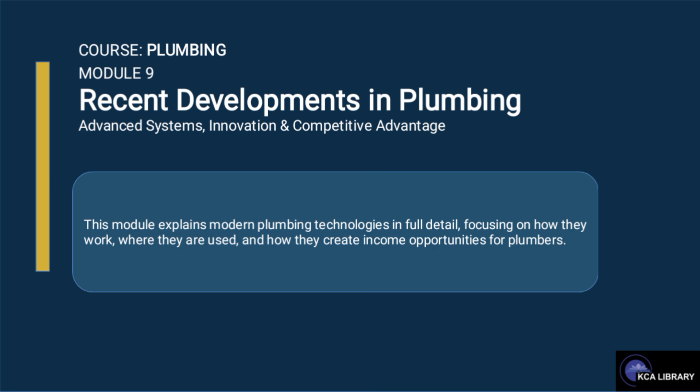We are gradually coming to an end in this course, plumbing. We'll be looking at Module 9, recent developments in plumbing, advanced systems, innovation, and competitive advantage. So this module explains modern plumbing technologies in full detail, focusing on how they work, where they are used, and how they create income opportunities for plumbers.

So by way of module objectives, this module aims to introduce learners to recent developments and innovations shaping the plumbing industry, enabling them to move beyond traditional practices and adopt modern solutions. By the end of the module, learners will understand key advancements such as smart plumbing systems, eco-friendly features, PEX piping, solar water heating, and digital tools, and explain how these technologies improve efficiency, reduce cost, and enhance service delivery.

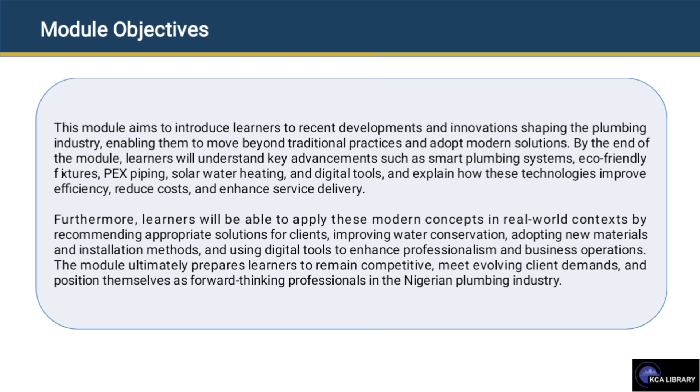Furthermore, learners will be able to apply these modern concepts in real-life context by recommending appropriate solutions for clients, improving water conservation, adopting new materials and installation methods, and using digital tools to enhance professionalism and business operations. The module ultimately prepares learners to remain competitive, meet evolving client demands, and position themselves as forward-thinking professionals in the Nigerian plumbing industry.

By way of introduction, plumbing is no longer limited to pipes and fittings. The industry is now integrating electronics, automation, and sustainability systems. This shift changes the role of the plumber from a repair worker to a system specialist who understands both water and technology. So those who adapt gain access to higher paying jobs, while those who ignore these changes risk becoming outdated.

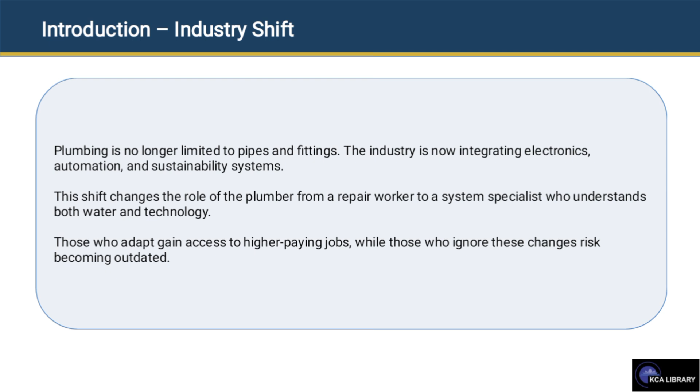So smart plumbing, what is smart plumbing? This combines sensors, connectivity, and automation to monitor and control water usage. Instead of waiting for problems to occur, these systems will detect issues early and respond automatically. So it's now shifting from reactive maintenance to predictive maintenance.

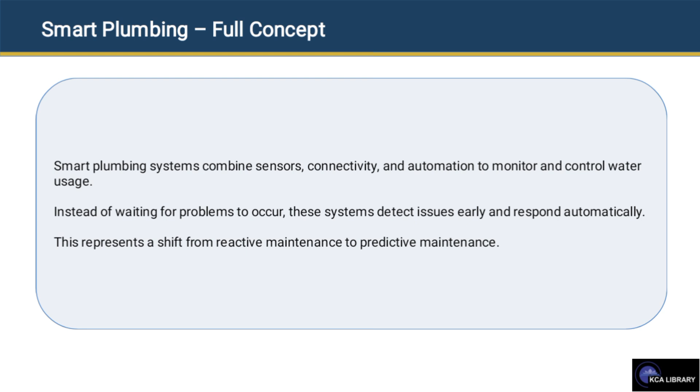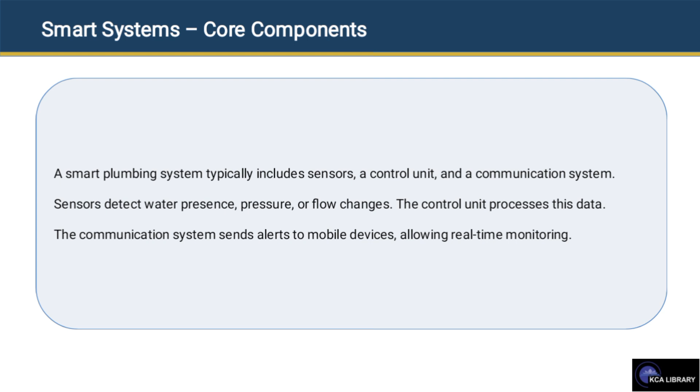Smart system, what are the components? So for this smart plumbing, these are the components. It involves sensors, control units, and communication systems. The sensor will detect water presence or flow change, while the control unit will process the data and communication will send alerts, allowing real-time monitoring.

Smart leak detection, how it works. So leak detectors use conductive sensors. When water touches both contacts, an electrical circuit is completed. This will trigger a signal that is sent to the central or mobile device. This process happens instantly, allowing early detection before visible damage occurs.

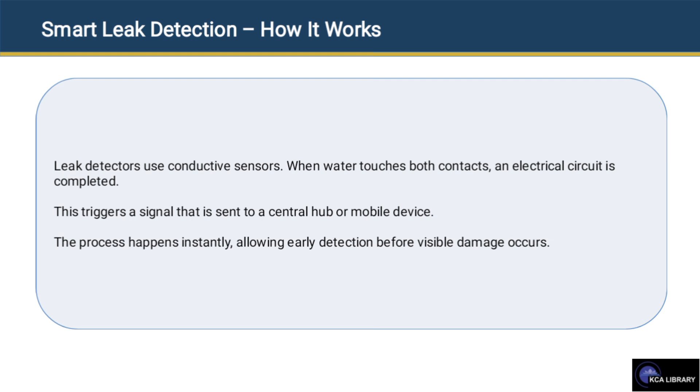Now, what is the real impact of this smart leak detection? A small leak under a sink can go unnoticed for weeks, causing wood rot, mold growth, and structural damage. Smart detection prevents it by alerting the user. This reduces repair cost and prevents property damage.

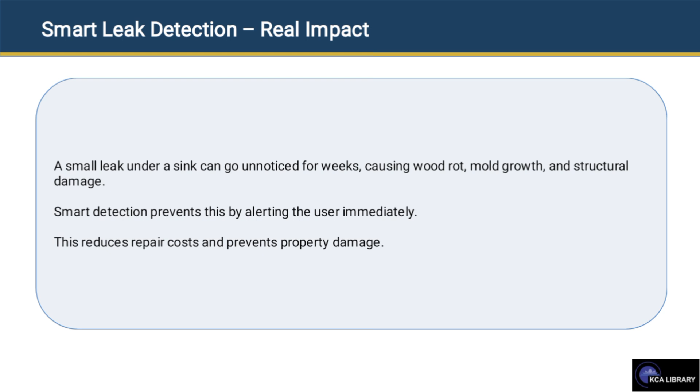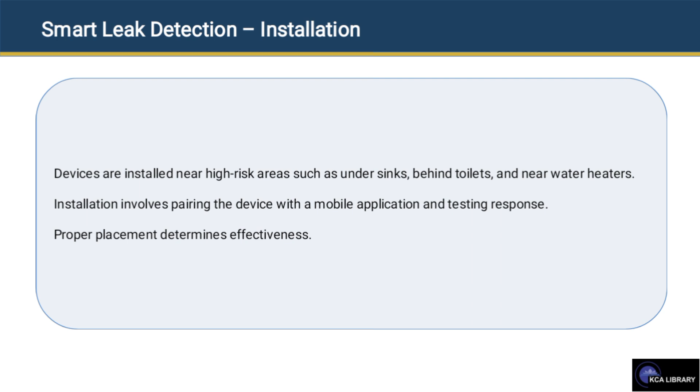So how do you install? Devices are installed near high-risk areas such as under the sink, behind the toilets, and near water heaters. Installing this involves pairing the device with a mobile application and testing the response.

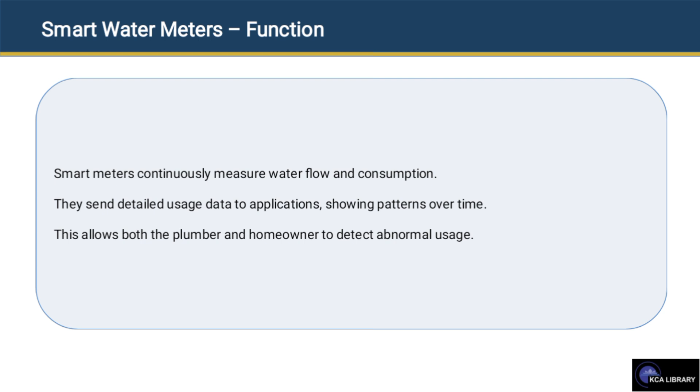Let's look at smart water meters. What are smart meters? They continuously measure the water flow and the consumption and send details to an application showing the patterns over time. It allows you to detect abnormal usage.

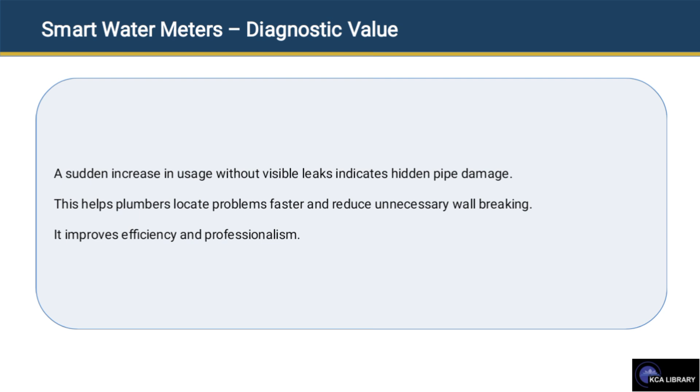Now, let's look at the diagnostic value. A sudden increase in usage without visible leaks indicates there's hidden pipe damage. This will help the plumber to locate problems faster and reduce unnecessary wall breaking. It improves efficiency and professionalism.

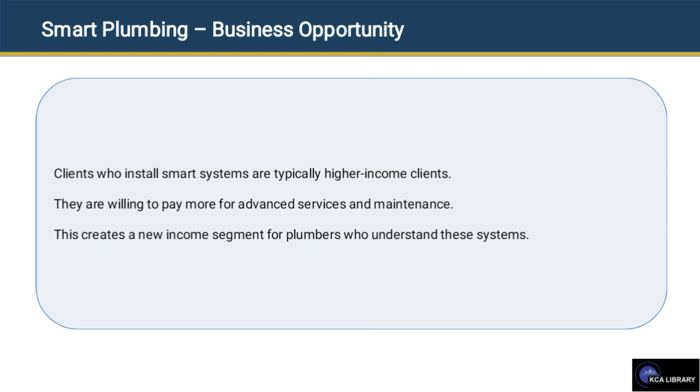Now, for the business opportunities, clients who install smart systems are typically higher income clients, which is true. They are willing to pay more for advanced services and maintenance.

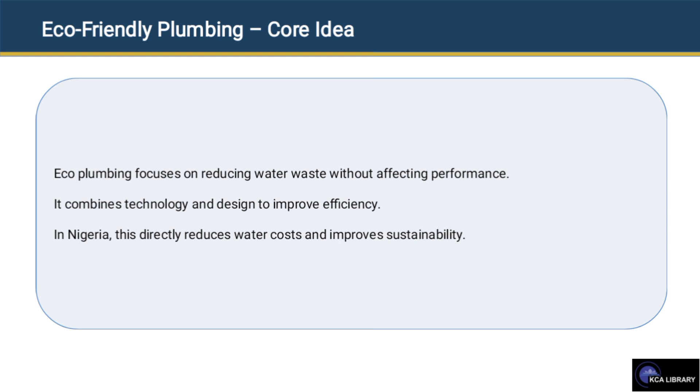Let's look at the core idea of eco-friendly plumbing. Eco-plumbing involves reducing water waste without affecting your performance. It combines technology and design to improve efficiency. In Nigeria, this directly reduces water cost and improves sustainability.

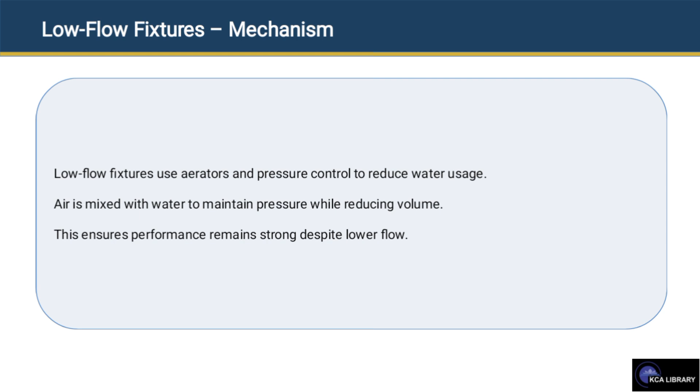Let's look at low flow fixtures, the mechanism. Low flow fixtures use aerators and pressure control to reduce water usage. Air is mixed with water to maintain pressure while reducing volume. This ensures performance remains strong despite lower flow.

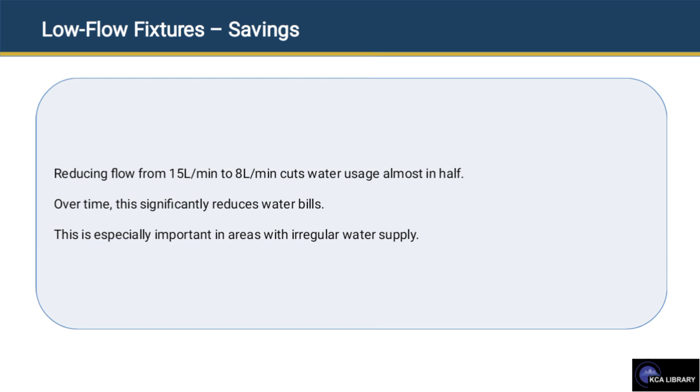Let's look at savings. Low flow fixtures savings. Reducing flow from 15 L per minute to 8 L per minute cuts water usage almost in half. Over time, this significantly reduces the water bill. This is especially important in areas with irregular water supply.

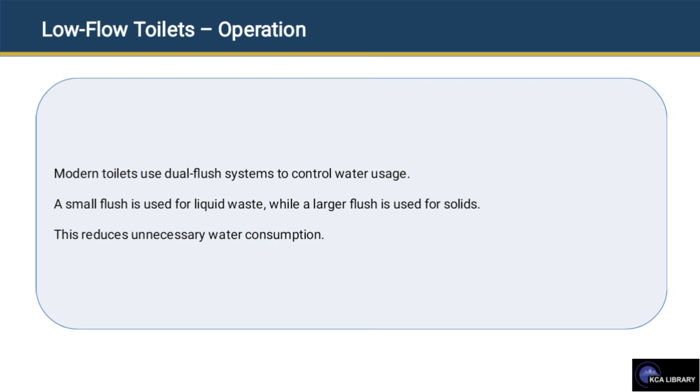Let's look at the operation of low flow toilets. Modern toilets use dual flush systems to control water usage. A small flush is used for liquid waste, while a larger flush is used for solids. This will reduce your water consumption.

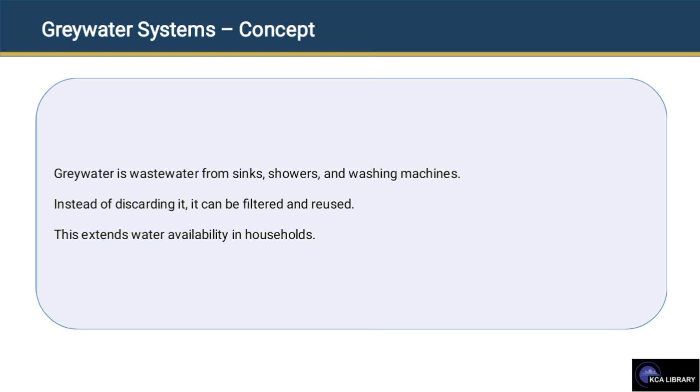The system flow in grey water, how it works. Water is collected from outlets, filtered, and stored in a separate tank. It is then reused for irrigation or toilet flushing.

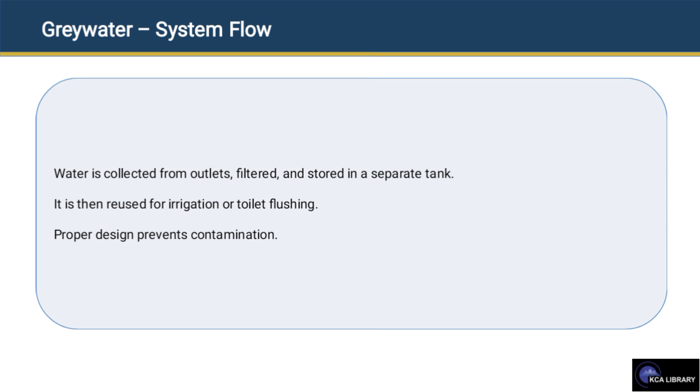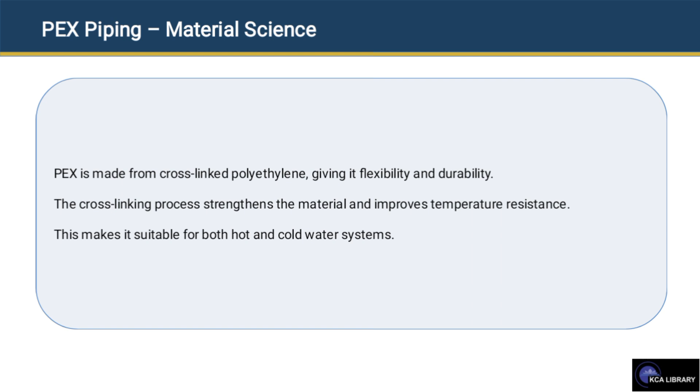Let's look at PEX piping. PEX is made from cross-linked polyethylene, giving it flexibility and durability. The cross-linking process strengthens the material and improves temperature resistance. This makes it suitable for both hot and cold water systems.

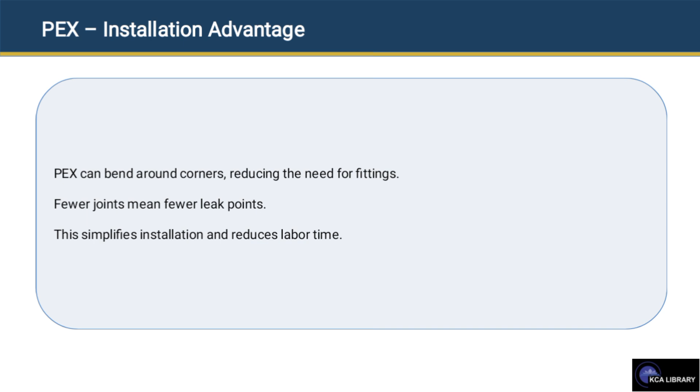How do you install? What are the advantages? PEX can bend around corners, reducing the need for fittings. Fewer joints means fewer leak points. This simplifies installation and reduces the labor time.

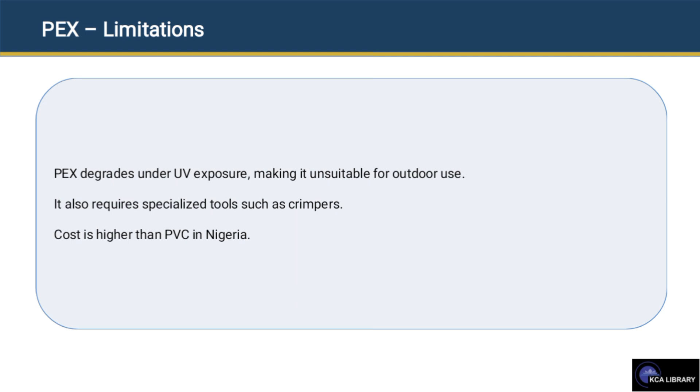Limitations: PEX will degrade under UV exposure like the sun, making it unsuitable for outdoor use. It also requires specialized tools and it is very expensive.

Let's look at solar water heating. Solar heaters use sunlight to heat water through collectors. Heated water is stored in a tank for later use. So this reduces electricity dependence, especially in Nigeria where we may not have electricity.

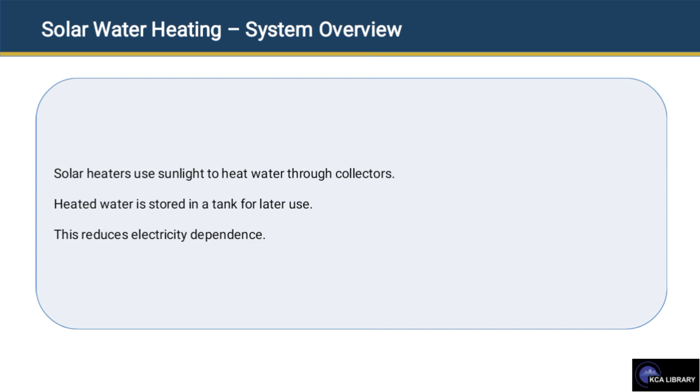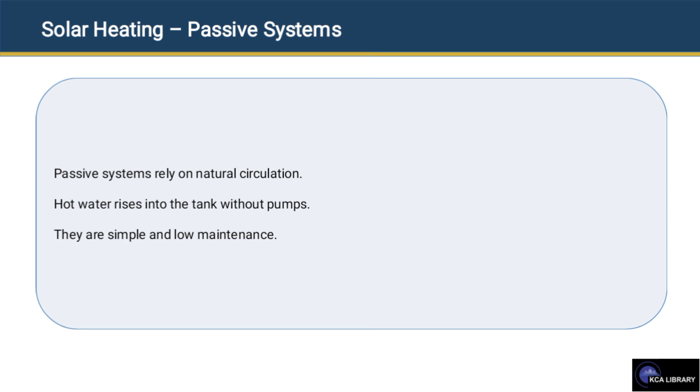Solar heating. Let's look at the passive systems. Passive systems rely on natural circulation. Hot water rises into the tank without pumps. They are simple and low maintenance. Then we have active systems. Active systems use pumps and controllers to move water. They are more efficient for large buildings, but they are complex and more expensive.

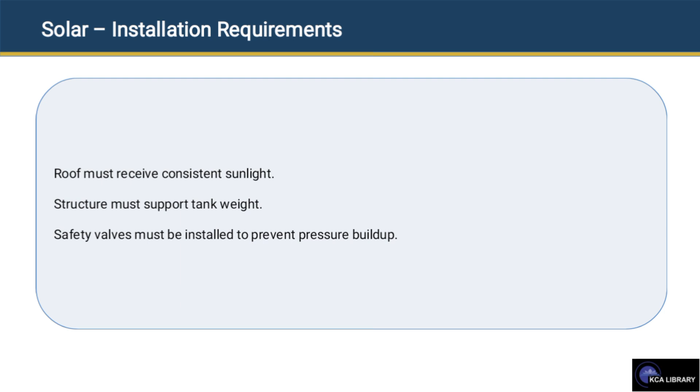Then what are the requirements? The roof must receive consistent sunlight. It must support the tank weight. And safety valves must be installed to prevent pressure buildup.

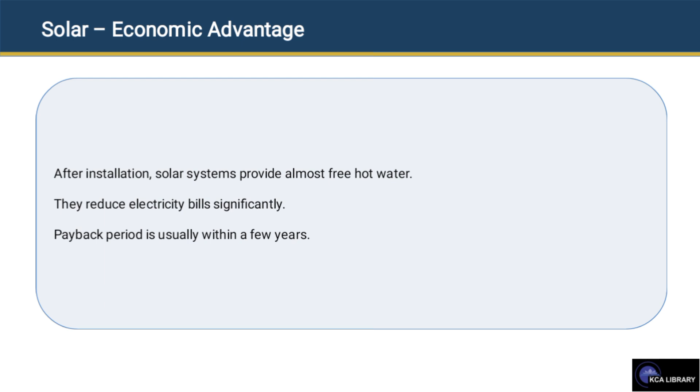Then what's the economic advantage? After installation, solar systems provide almost free hot water. They reduce electricity bills significantly. Then the payback period is usually a few years.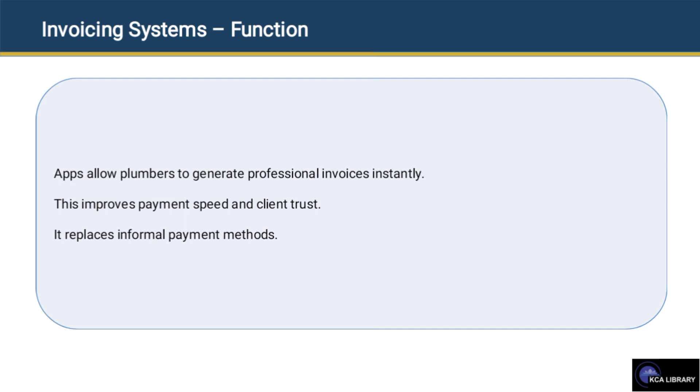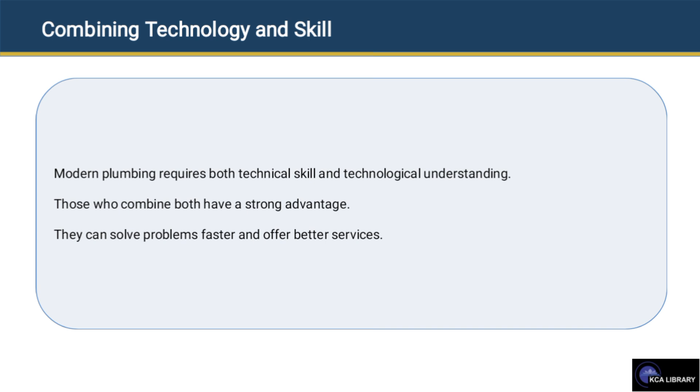How do you combine technology and skill? Modern plumbing requires both technical skill and technological understanding. Those who combine both have a strong advantage. They can solve problems faster and offer better services.

Now, where is plumbing going? What is the future of plumbing? The future of plumbing will involve automation, sustainability, and data analysis. Plumbers will become system managers rather than just repair workers. Continuous learning will also be very essential.

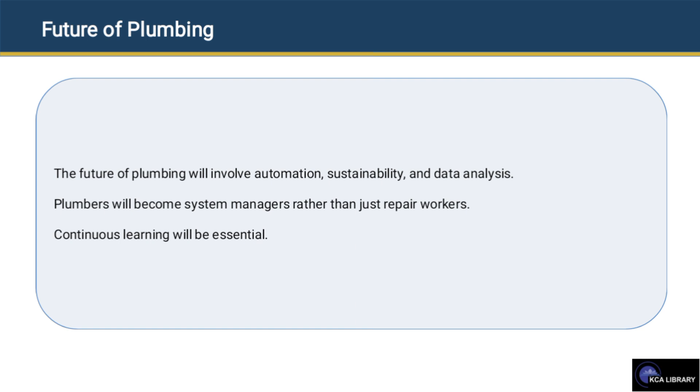Now, by way of conclusion, this module shows that plumbing is evolving rapidly. Those who adapt gain higher income, better clients, and long-term relevance. The plumber who learns continuously will always stay ahead of the market.